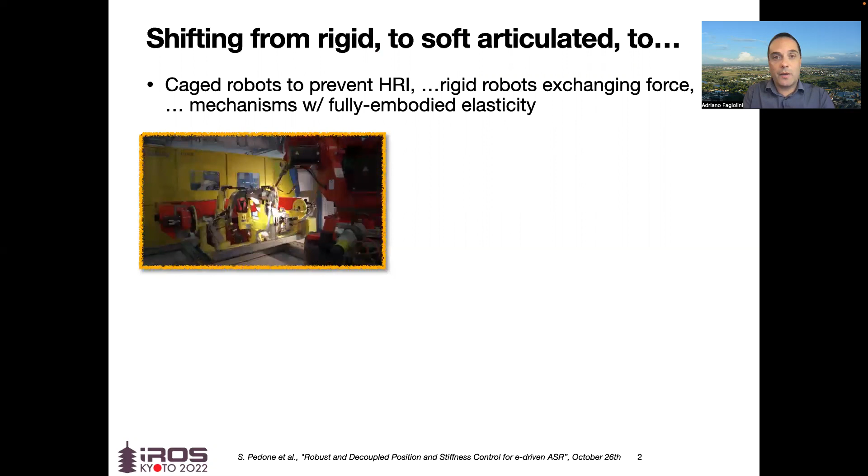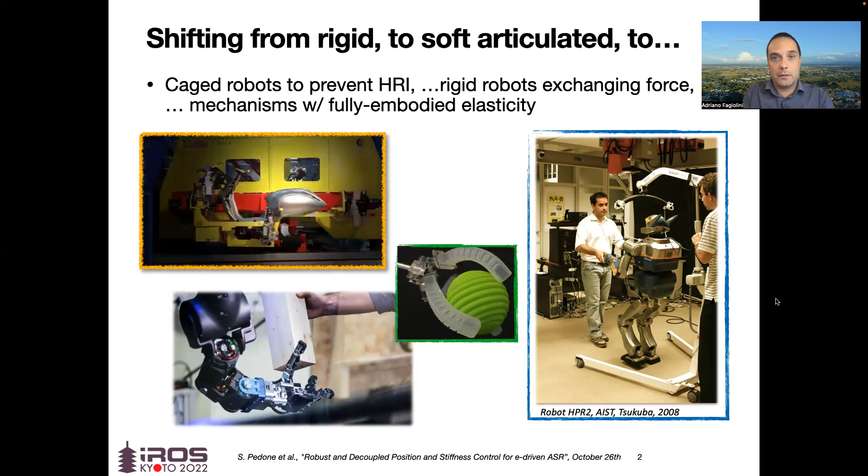We have all seen the continuous shifting from rigid robots caged in order to prevent human-robot interaction to rigid robots interacting with humans and exchanging forces in order to accomplish their tasks. And we're really looking forward to having mechanisms with fully embodied elasticity. In this work, we focus on articulated soft robots with rigid links and elasticity concentrated at their joints. And we assume that actuators can change the link positions and set the internal joint stiffness. And we focus on the electrically driven ones.

In this context, we want to close the loop on both position and stiffness simultaneously and in a fully decoupled way, so that an end user can independently specify the desired trajectories with these two variables. We believe that such an approach can enable in the near future faster, more dynamic, and more reactive applications with robots.

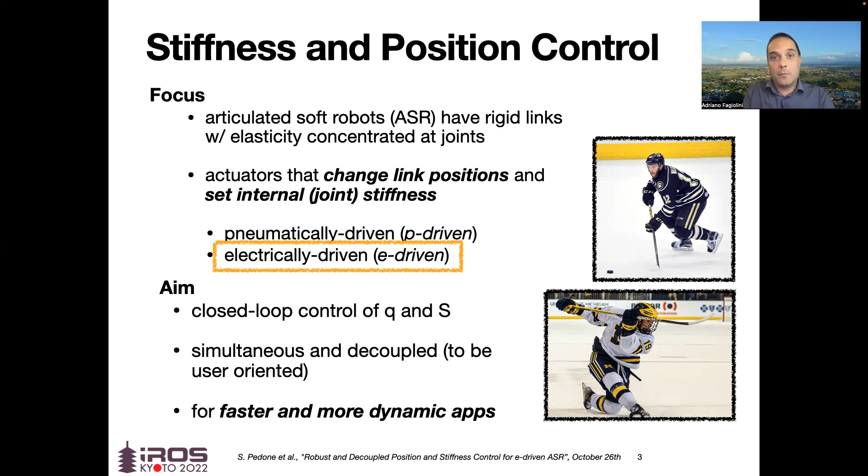The model of a soft robot with electrically driven actuation comprises a link dynamics with elastic torque acting as an input, and two agonist and antagonist motor dynamics, where the deflection vectors phi A and phi B play a fundamental role. As for stiffness, as we all know, it is defined as the partial derivative of the local elastic torque with respect to the local deflection variable. In this way, the model is overall differential and algebraic, which is the reason why common approaches close the loop on position but control stiffness only in open loop.

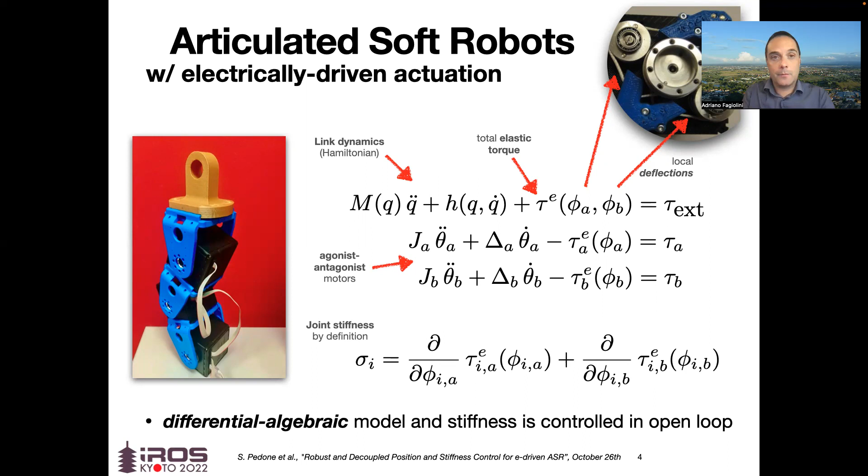In developing our solution, we want to minimize also the information needed to realize the controller. As a first step, we factorize the actuation model by using functions from a basis that depends on the deflection variables, which are quite general. In this way, the elastic torque is factorized as a product of the constant matrix pi and the regressor matrix gamma, which is block diagonal and that can be systematically obtained. In this way, we obtain the formula that is the last expression in this slide.

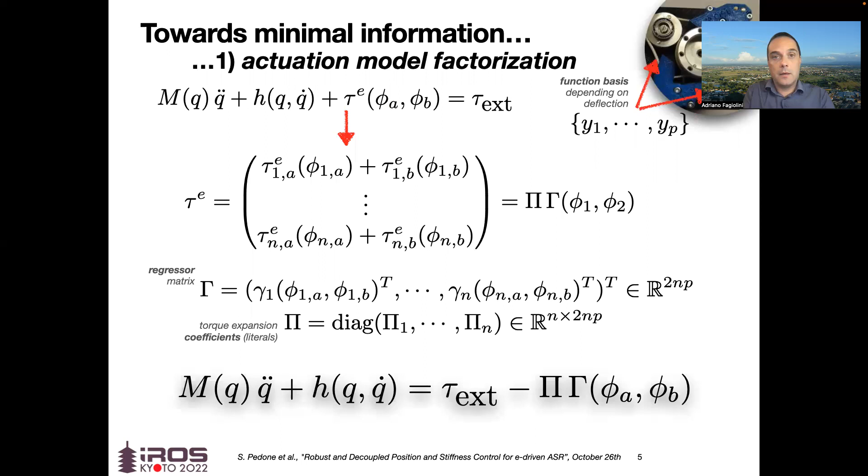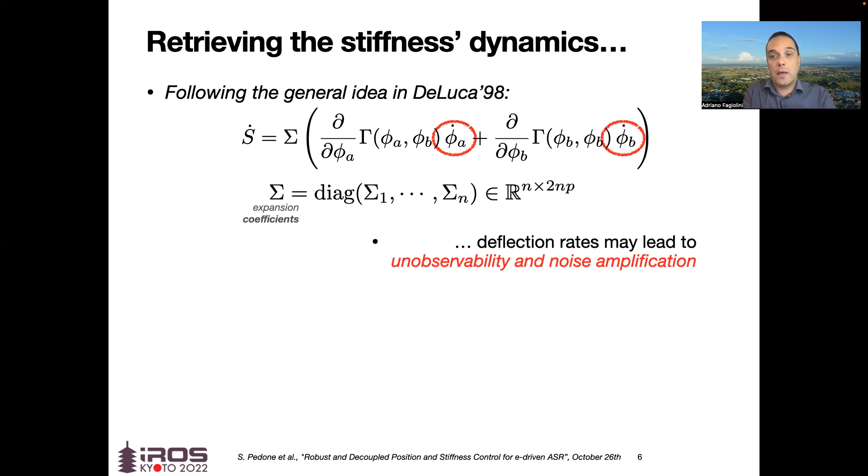Moreover, we want to obtain a stiffness dynamics, and following the idea by De Luca and Lucibello in 1998, we consider the time derivative of stiffness, which by using the basis function reads as in the formula. As you can see, the expression depends on the deflection rates, the rate by which the deflection changes over time. And this may lead to unobservability issues and noise amplification that is undesirable.

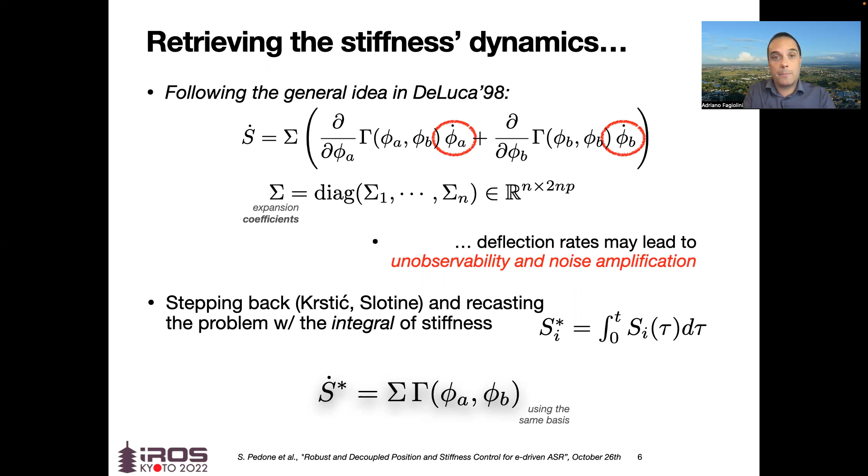A workaround for this problem is to step back and use the integral of stiffness, so that the derivative of the integral of stiffness, that is stiffness itself, can be factorized as a constant matrix sigma times the very same regressor matrix gamma. In this way, we obtain the following factorized model.

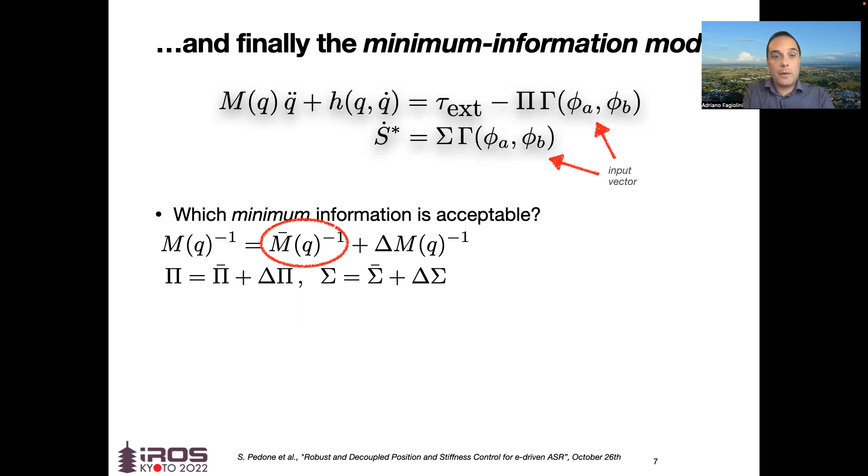Now, in the paper, we show what is the minimum information that is really needed to obtain a controller on this system. And we show that we actually only need to know a nominal value of the inverse of the inertia matrix, M bar to the minus 1. Analogously, we also assume that the matrices pi and sigma are also expanded in nominal plus deviation parts. By doing so, we can obtain a minimum model, the one that you can read in the last equations on the slide, which, however, is affected by unknown input signals.

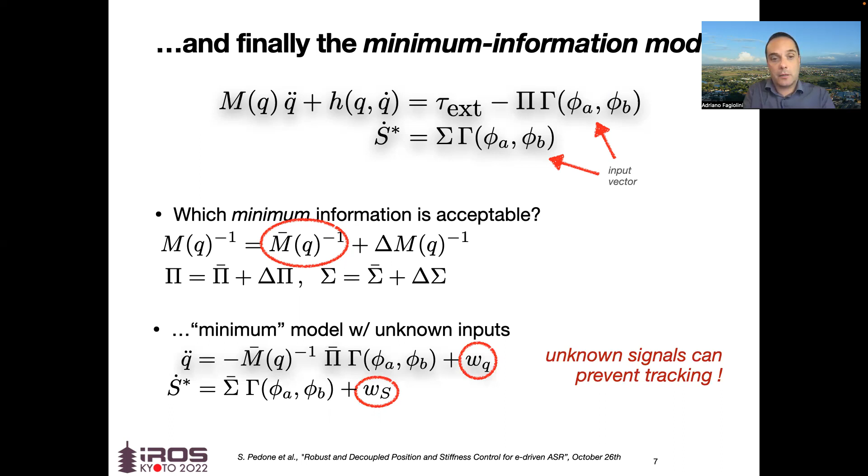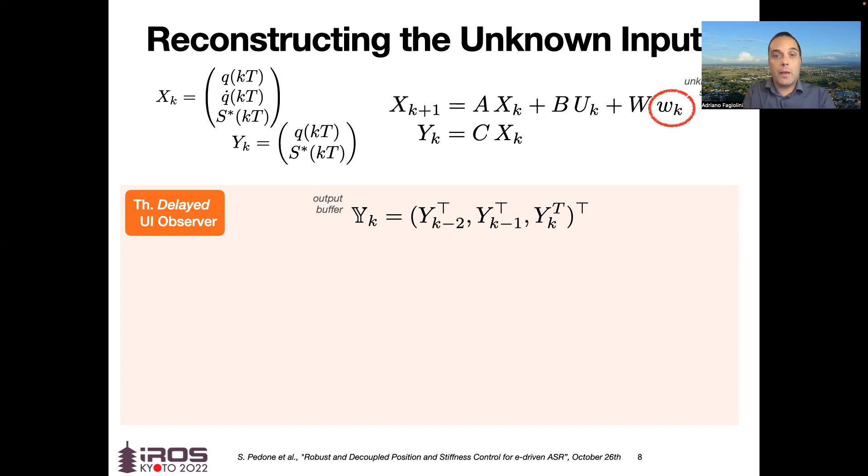Now, these unknown input signals are not vanishing, and in fact, they're actually very rich in their content, so they may prevent the convergence and the tracking of desired trajectories for Q and S. A way to overcome this problem is to estimate these unknown quantities, where in the paper we show how to recast this problem as a linear system and how to define a delayed unknown input observer by using an output buffer, including 3 consecutive output values. In this way, we can obtain a state estimator that has this form, and most importantly, we can reconstruct the unknown input with a delay of 2 samples.

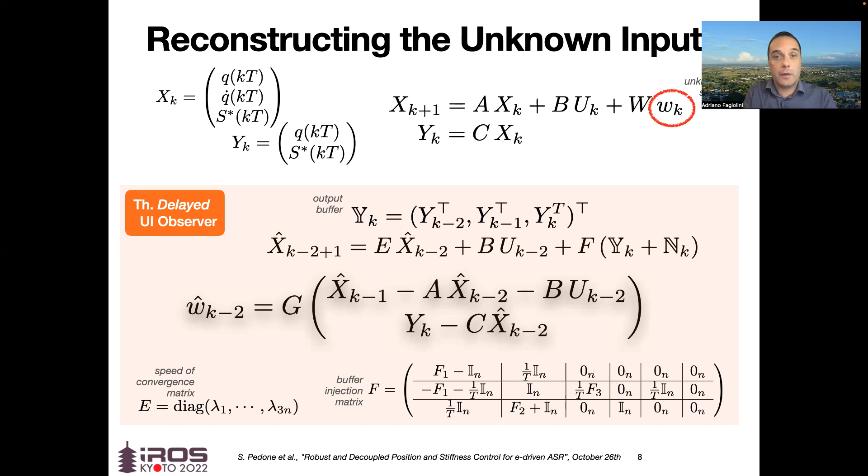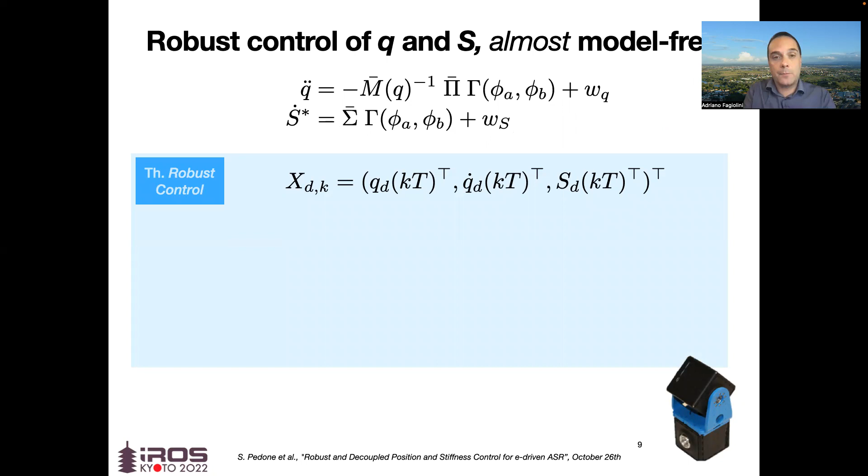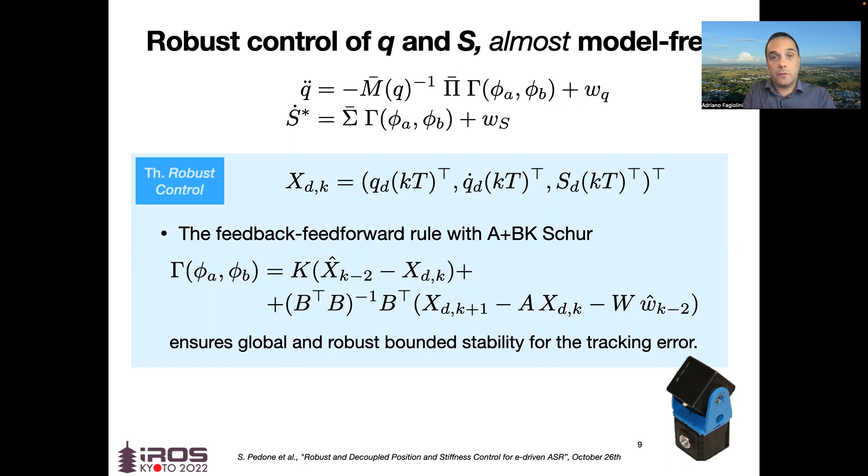The nice feature of this estimator is that the matrices that are involved, E, F, and G, have specific roles, and E, for example, decides the speed of convergence of the tracking errors. Now that we can estimate omega Q and omega S, we can actually design a robust controller that allows tracking of desired trajectories. This robust control includes feedback and feed-forward terms that depend on the error in the state, the error on the predicted state, and the compensation of the unknown inputs. And this controller can ensure global and robust bounded stability for the tracking errors. The proof of the theorem is reported in the paper.

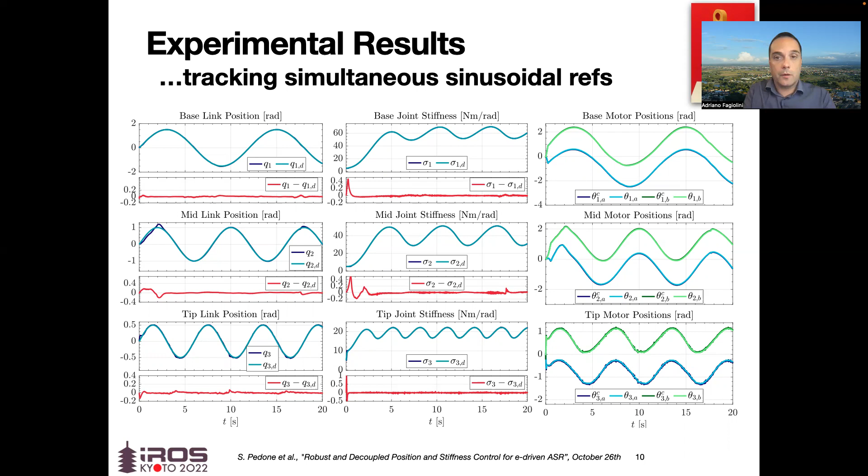We have implemented this and made experiments. And as you can see in the left two columns, we are able to simultaneously track position and stiffness signals with a 3-link robot. As you can see in the red lines, the tracking error converges to 0 nicely. Also, in the rightmost column, you can see the desired and the actually executed angles for the actuators. They nicely behave, so they are not producing wear on the actuators over time.

Finally, we have shown that our method is also robust to the choice of the nominal values. Basically, the choice of the nominal value can be quite arbitrary, while the accuracy of the method is not affected. So that's all on my side.